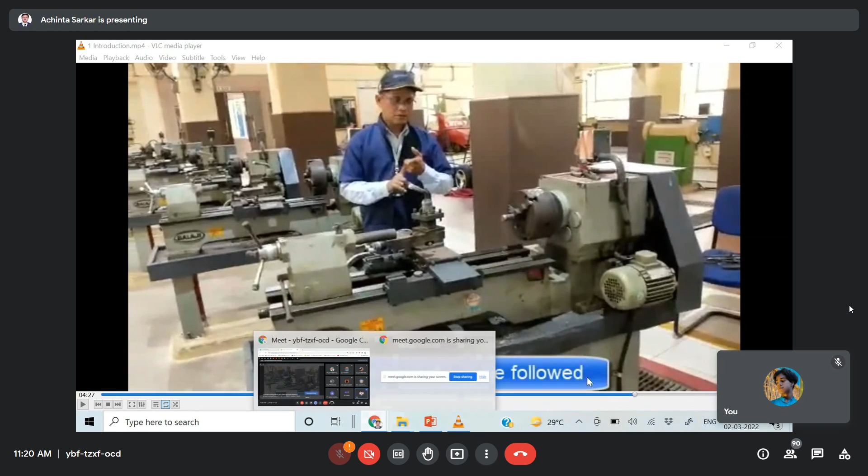So our aim is, sorry, our aim is to make the finished cylindrical surface. Okay, so now please mute yourself.

Hello. Mute yourself Pritish, your mic is on.

So this one is called the chuck. Okay, and this one is called the three-jaw chuck. Three-jaw chuck means, so here there is a hole on this outer surface. So if you tighten or loosen it, there will be the simultaneous movement of these three jaws, radially, inward or outward. If you tighten it, then these three jaws move in the inward direction, right? So now, in order to fix this job, you have to insert it into this hole of this three jaw chuck, and if you tighten it, then it will be fixed rigidly.

Now we can see this one is the motor, right? So the motor, and here there is a gearbox inside this space, okay, of this metallic container. Now if you revolve it, so here belt and pulley is there, right? Okay, so if you run the motor, then this chuck will revolve, right?

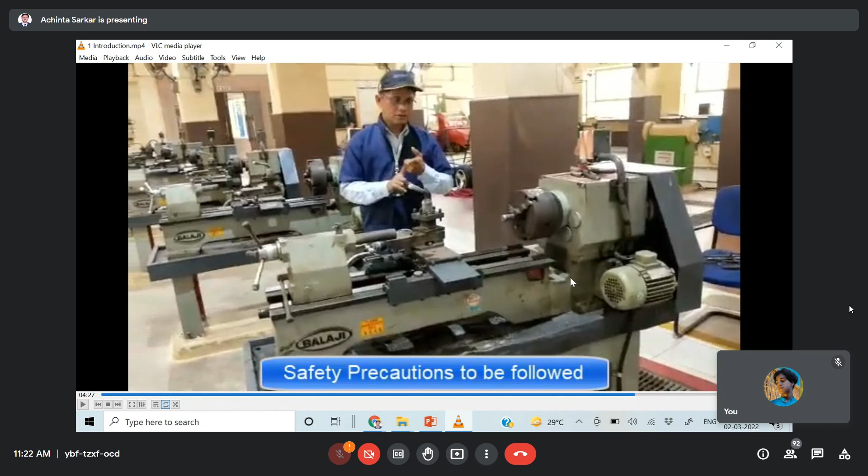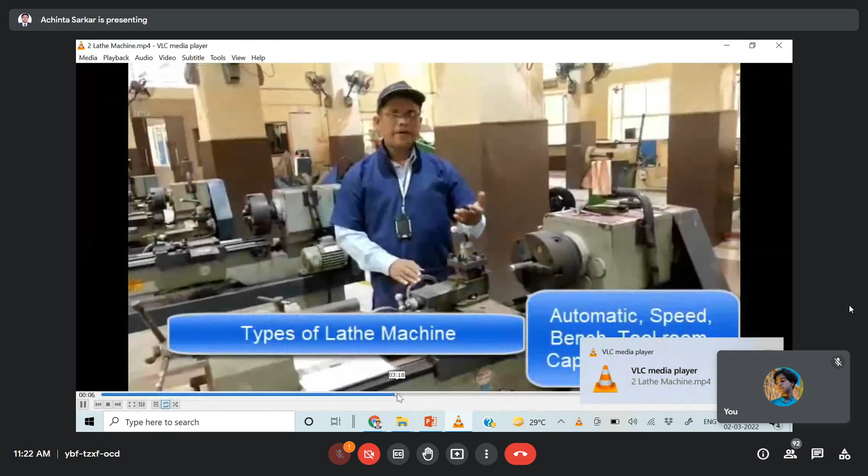Now if you move it to this job, right? So let me draw. Let me show you another one. Here this one is the tool post.

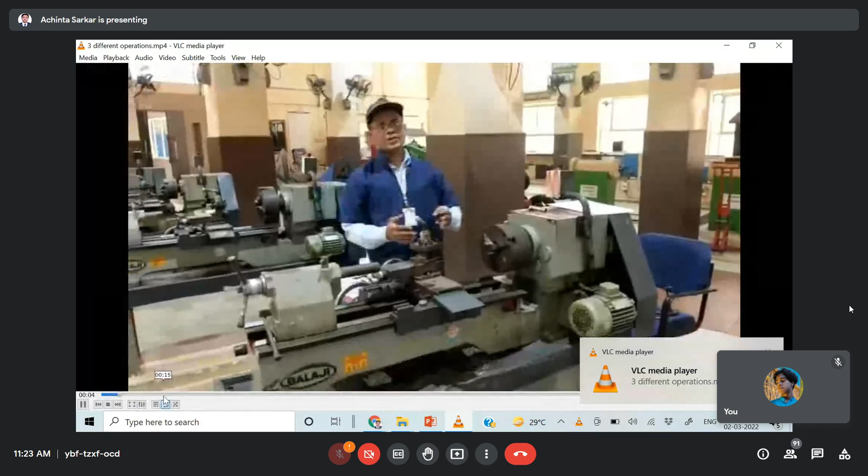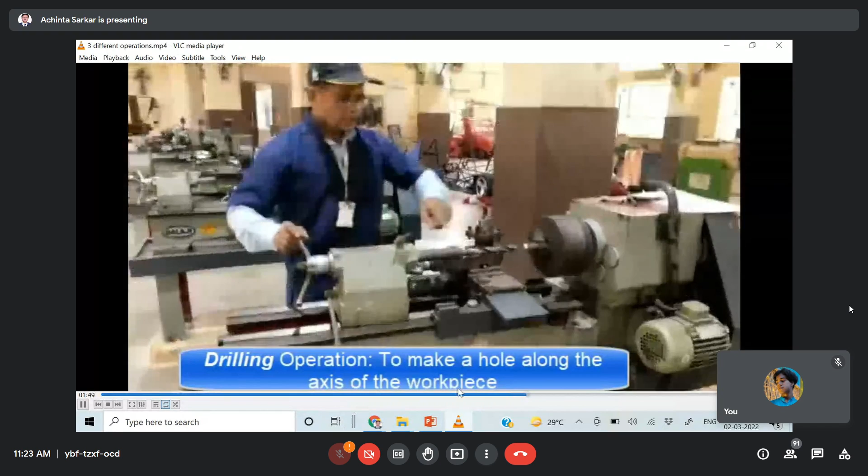You can see here, is it visible? Yes sir, yes sir, yeah, it is visible sir. Okay, so here you can see there is a revolvement of this chuck. Okay.

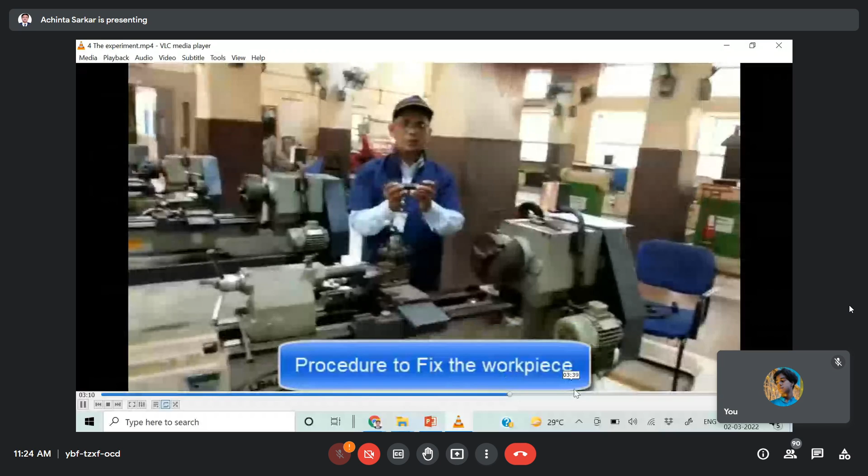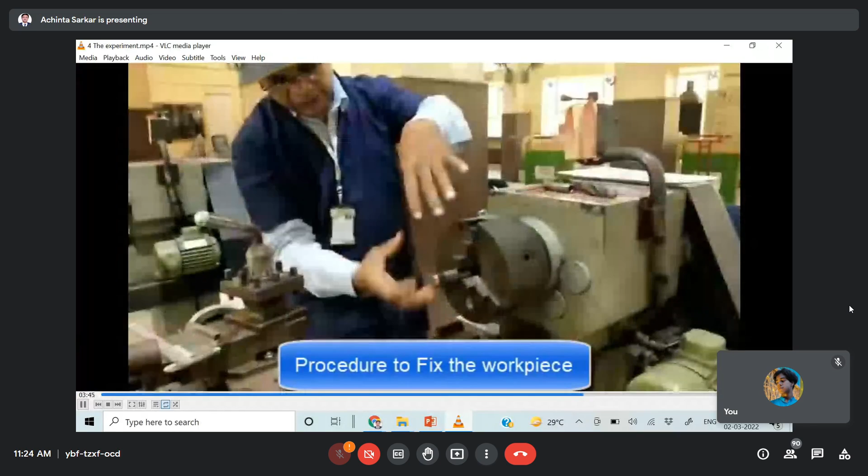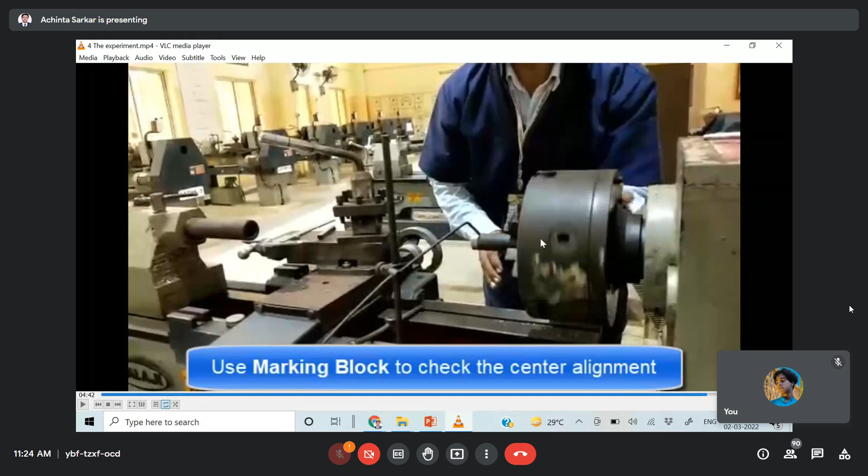I just want to show you how. You have to fit the cutting tool. This one is the cutting tool. For the cutting tool, you have to create a cutting edge. Where is the cutting edge? This is the cutting point. Okay, this is the cutting edge.

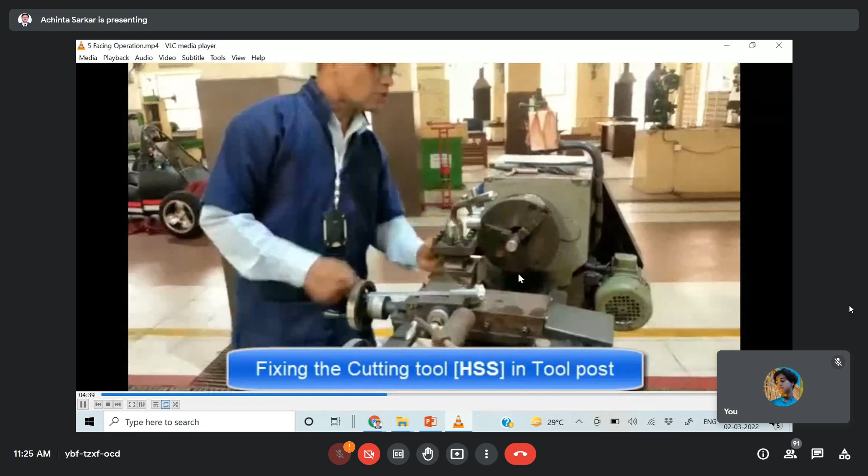Here, the angle of the cutting tool, you have to maintain. Why do you have to apply this angle to the cutting tool? That means the cutting point should be made such that there is no material remaining in the center of the workpiece. So the cutting point should exactly match the center of the workpiece. That's why now study how.

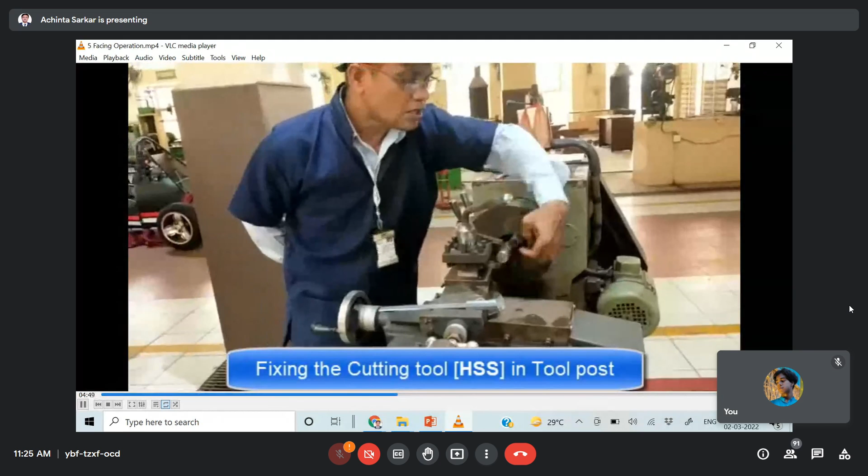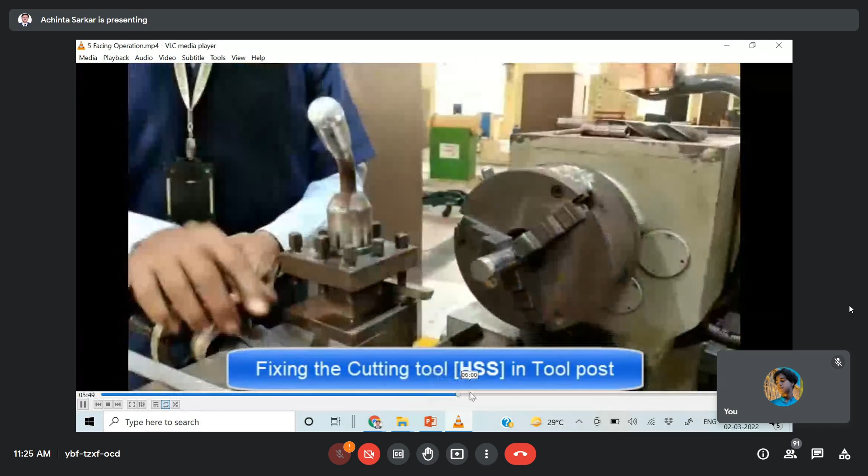From the rigidly formed cutting tool to the tool post, so that it can cut. Okay, that's why the tool is set from the outer workpiece. That's why it is made like this. You can see this one is a cutting tool.

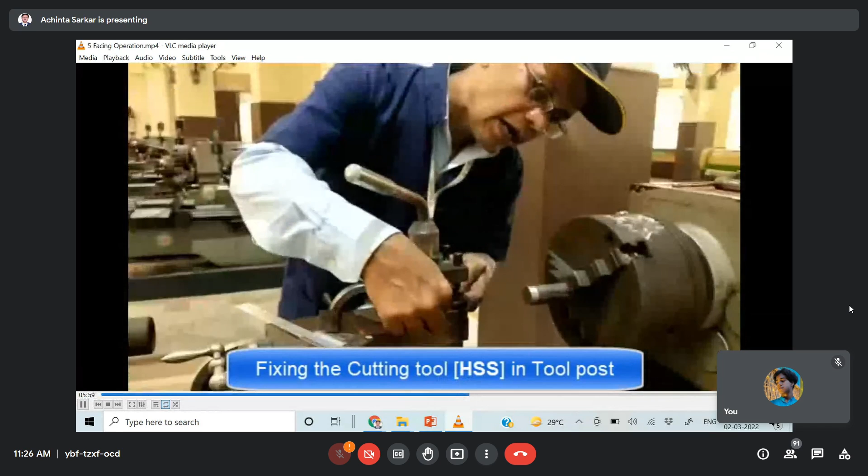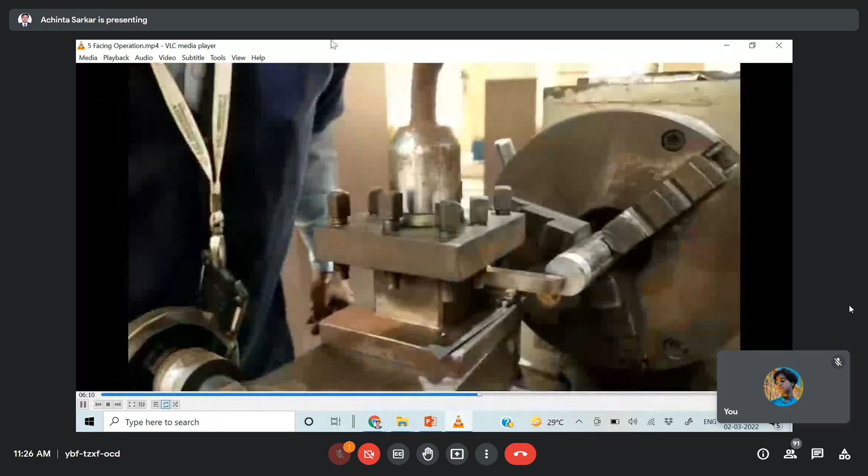It has to go through this center. That's why now you have to type. For tightening tool post, first you have to log the center.

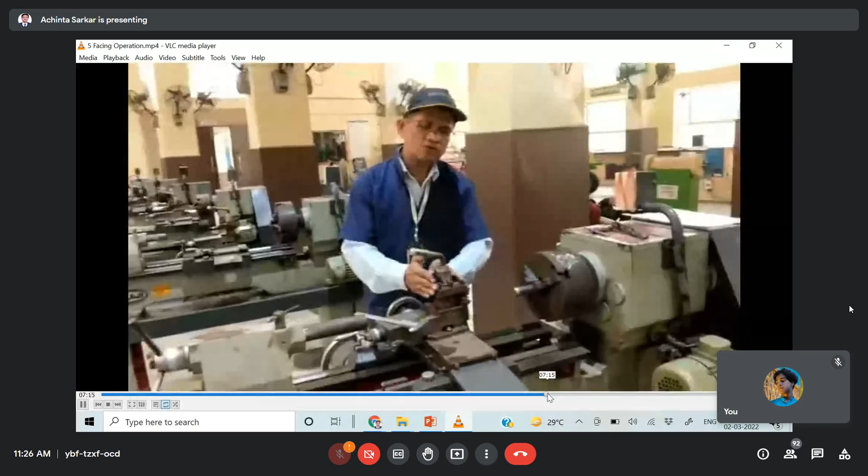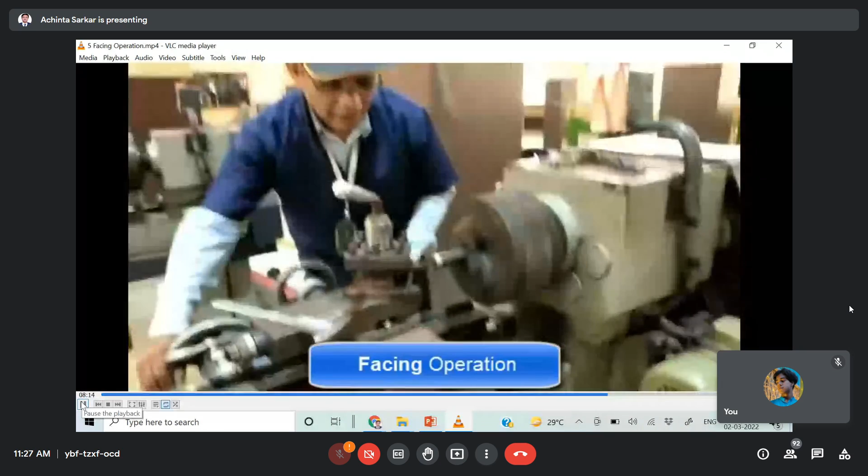If you slide this tool, this is the sliding mechanism. If you slide it in the longitudinal direction, then it will cut this outer surface, and if you move or slide along the cross section, or it is called cross-wise direction, then it will cut the material from the face. It is called the facing operation.

So there are two kinds of feeding. One is called the longitudinal feed, and another one is called the cross feed. Longitudinal feed is the feed along the axis of the job to cut the extra material from the outer surface of the job, and when it is perpendicular to the axis of the job, then it is called the cross feed. It is to cut the extra material from the face, in order to make the face a flat surface. Understood? So these are the idea.

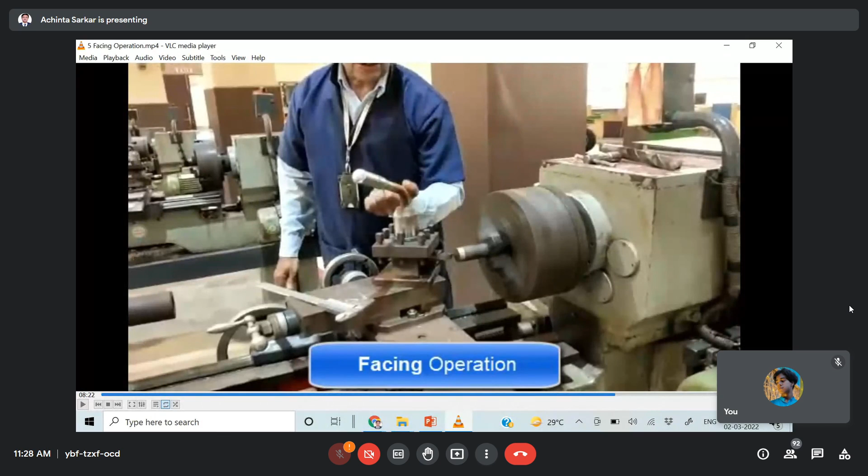This one is the idea about the turning. Okay, so now let me draw the figure.

Screen is visible, right? Yes, sir. Yes, sir. Yes, sir. Okay. Yes, sir.

So this one is the axis of the job. Spindle is there. This one is the big spindle. This one is the cutting tool. Oh, sorry.

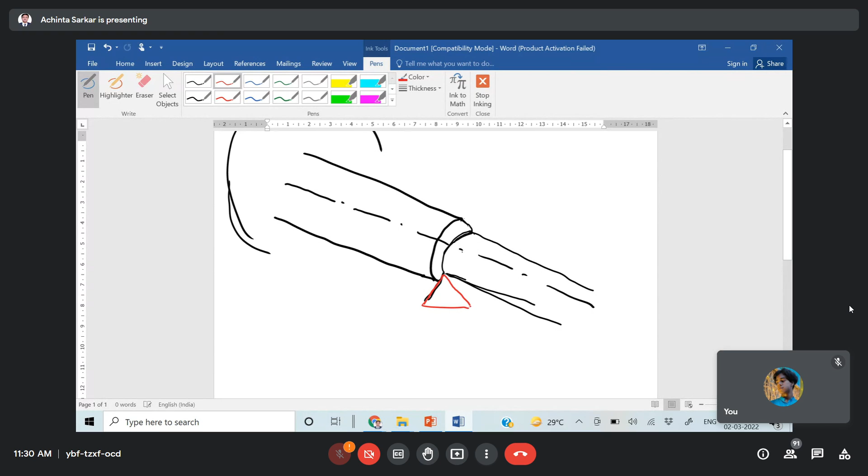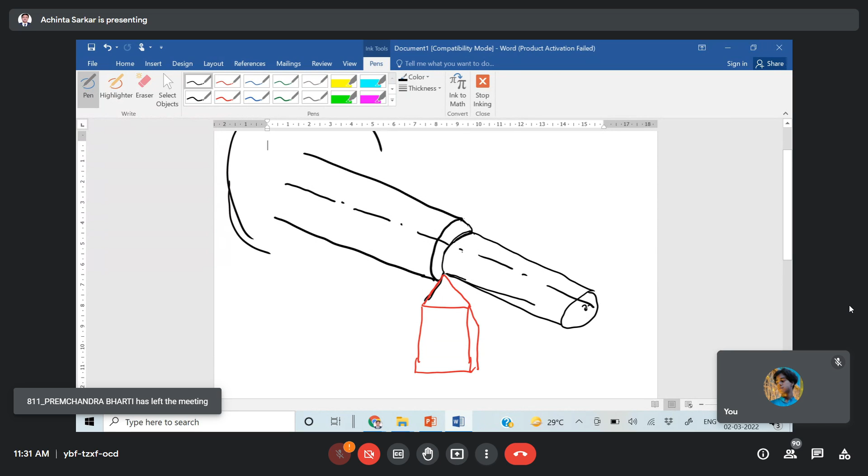Whatever you have seen in the video, so this one is the cutting tool, here it is in the 3-jaw chuck. Now you can see actually these two will be perpendicular to each other, so the angle is 90 degrees. So you have to imagine.

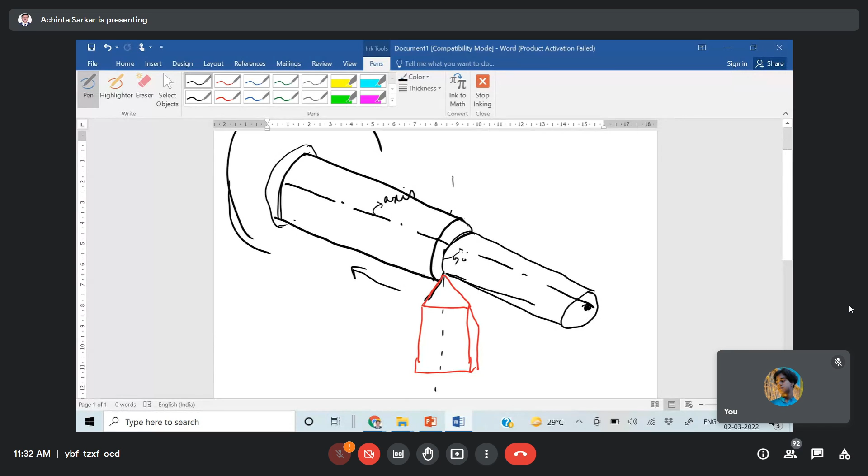So now you can see, student, there are two kinds of feed. One is along the axis, so this one is the axis, and another one is along the cross-wise direction of the axis, so that one is this one.

So when this tool is on the tool post, when this tool moves along the longitudinal direction or parallel to the axis, then it will remove the extra material from the outer surface of the job in order to make the desired cylindrical shape.

Understood? And if it is moved along the cross-wise direction, so this one is nothing but this one, then it will cut, it will make a groove, or you can say you can do a facing operation.

Understood? So if it only goes towards one direction, then what will happen? It will cut only at a single point, so it could be either here or here at any point. So it will make a groove if there is no movement and it only moves in this direction.

But when the tool moves from here in this direction, then it will cut the extra material from the outer surface and it will make the finished cylindrical surface. Now say here this one is the face.

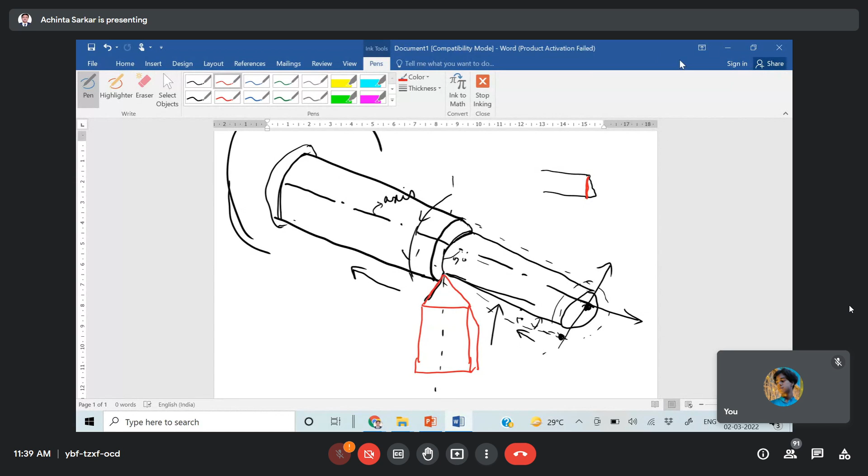Student: Yes, sir. Okay. So now we will discuss the various parts of the lathe machine.

So we'll draw it right now after the turning part? Yes, yes, yes, okay.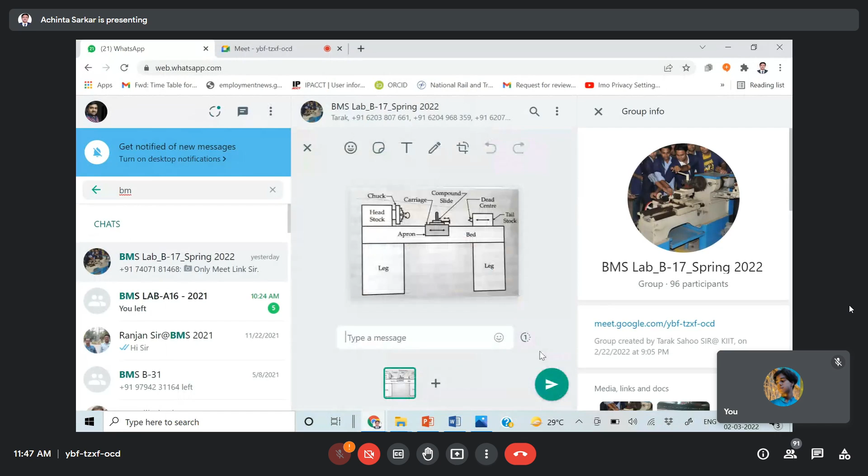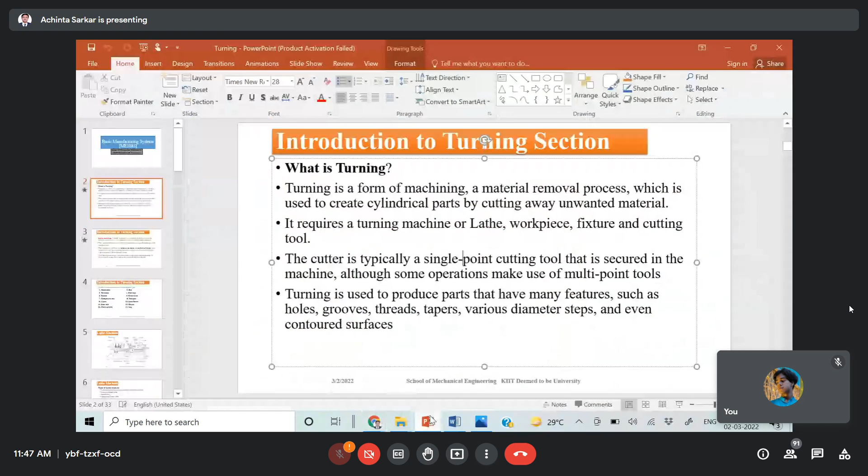First you write the parts of the lathe machine. Sir, after what is turning, we have to write the parts? Yes, parts. Okay sir.

So we have to continue like after turning? Yes, yes, yes, yes, after turning.

After this, draw the figure whatever I have shared in the WhatsApp group. Do not use any scale or anything else. So it should be freehand. Yes, it should be a freehand sketching.

Okay sir. It can be drawn with both pen and pencil, or no? Yes, yes, yes, both pen and pencil, no issue.

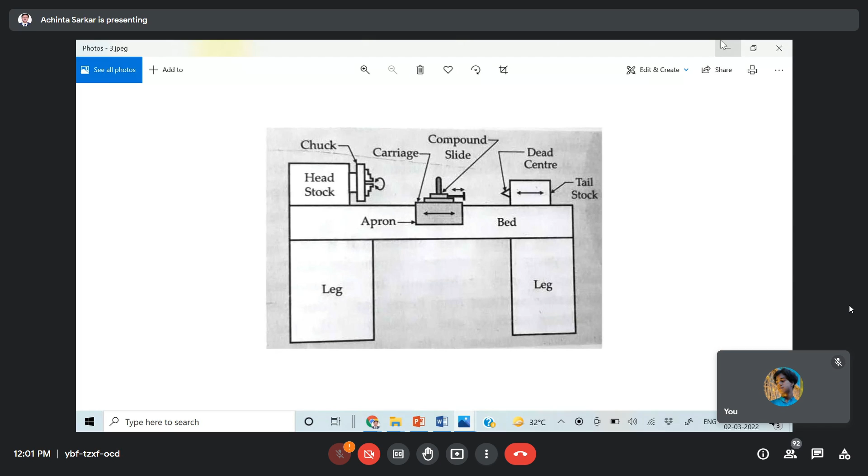So now the carriage is this one. Here it is called the carriage. The lathe carriage serves the purpose of supporting, guiding, and feeding the tool against the job during the operation of the lathe. This one is the tool post, and this one is the bed, and on the tool post, so this total system is called the carriage.

So now you can see here, this one is called the compound rest. By the use of this compound rest, you can rotate this tool post by 360, and this one is the cross slide, cross feed. You can give cross feed as well as the longitudinal feed. So it can move to and fro as well as in the crosswise direction.

So I have drawn a figure here. This one should be like this. So now, students, we are traveling this tool parallel to the axis. Now if you make some angle with this axis, then what will happen? It will be like this. Say your tool is there. If you move this tool from here in this direction, then what will happen? Say it is here.

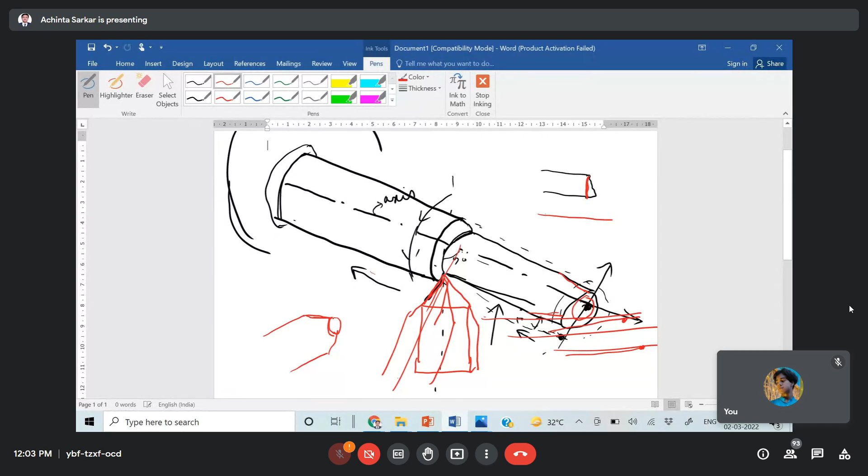Okay. So it will make like this shape. Or if you draw the 2D diagram, then it will be like this. Understood? This is the taper section. Yes, sir. So if you make some angle by rotating this compound rest.

So these are all formed on the carriage. Now the carriage consists of the saddle. You can see this one is the saddle. The saddle can move in the to and fro direction. It is the part of the carriage which slides along the guideways and supports the cross slide. This one is the cross slide, and the compound rest. This one is the compound rest, and at last this one is the tool post. So the saddle supports the cross slide, then compound rest, then tool post.

Now the cross slide is mounted on the top of the saddle and always moves in a direction normal to the axis of the main spindle. So it always moves in this direction. Sorry, not rotation; it moves in the crosswise direction. So it is basically used to give the cross feed.

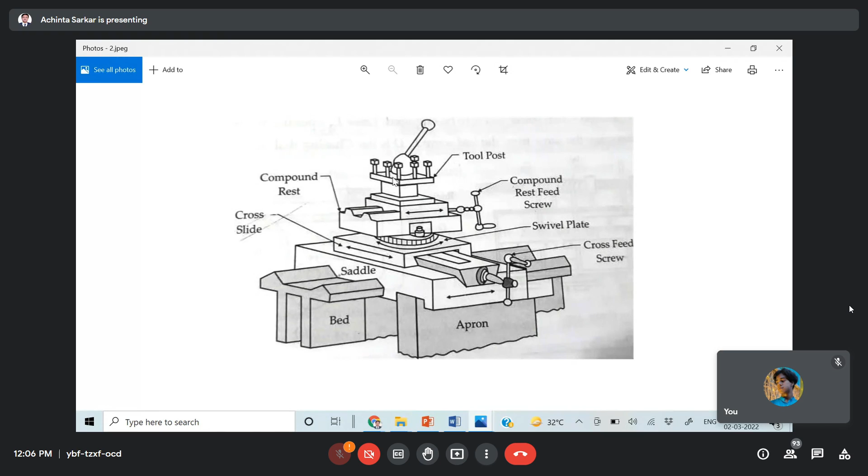Understood? Now the compound rest. This one is the compound rest. It is also known as the compound slide. It is mounted above the cross slide. And the tool post is the topmost part of the carriage and is used for holding the tool or tool holder in position. So after holding this tool, with the help of this compound rest, you can make any angle, any operation you can do.

Now this one is the three-jaw chuck. These chucks provide a very efficient and true device of holding the work on the lathe during the operation. So this one is the nut. If you tighten it or loosen it, then this jaw will move either in the inward or outward direction.

So this one is called the self-centering. You do not need to do anything. Once you insert and tighten it, it will perfectly stay on the center of this hole. Okay, right.

Three-jaw universal chuck. It is also known as scroll chuck or self-centering chuck. It consists of a cylindrical body having three jaws. You can see here, three jaws fixed radially at its front. Further, it carries a through hole at its center to enable the long job to project backwards in the spindle. So the spindle is there inside this chuck, right?

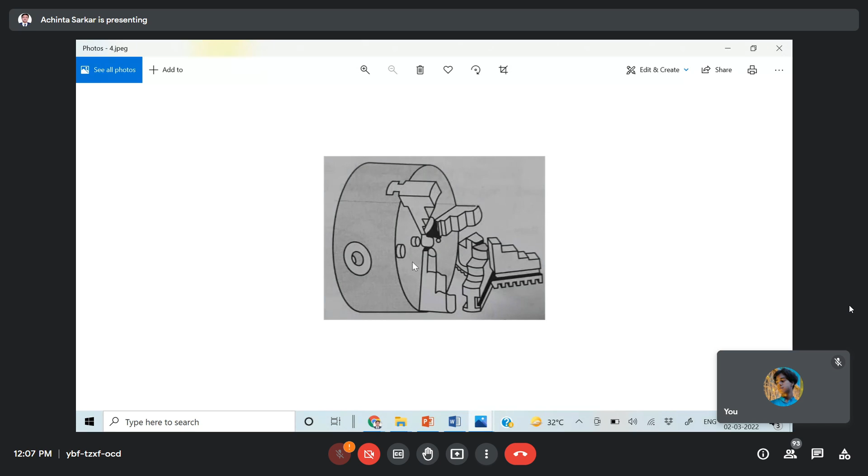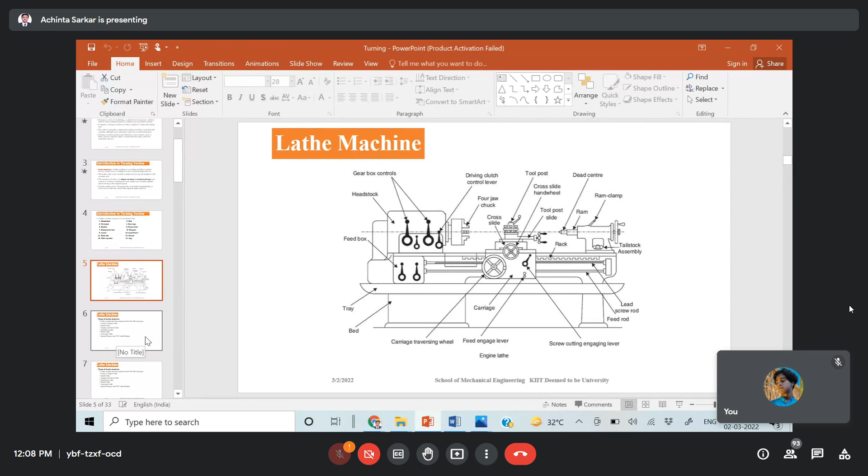So any question about these things? So should we have to draw this on our copy? Which one? Sir, the last three you showed us. Yeah. I'm not getting you. Tell me.

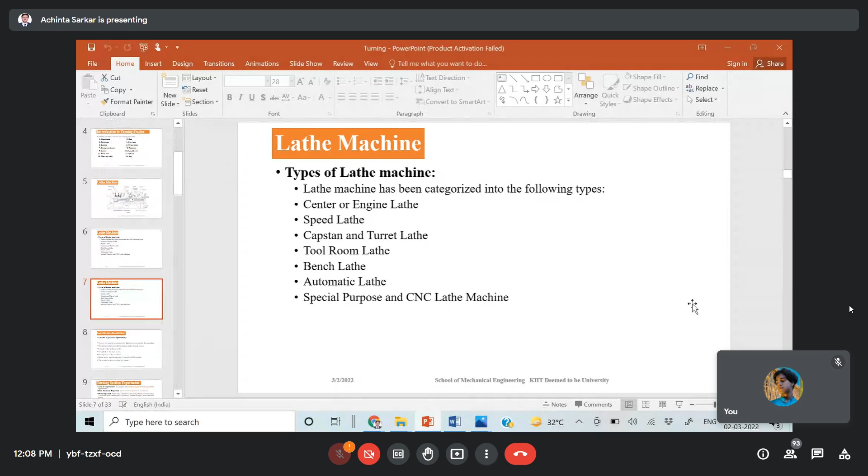Okay, now types of lathe machine. There are many kinds of lathe machine. Lathe machines have been categorized as center or engine lathe, speed lathe, capstan and turret lathe, tool room lathe, bench lathe, automatic lathe, and special purpose and CNC lathe machine. Okay. Sir, we'll write this? No. I'll tell you.

So a lathe is generally specified by the swing, the largest work diameter that can be swung over the lathe bed, and the distance between the headstock and tailstock centers. So there are two stocks, one is the headstock and the tailstock, right? So by this distance you can specify the lathe machine. Length of the bed in meters, the pitch of the lead screw.

So pitch, that is the distance from one point to the next. Suppose there is a thread on this rod, and the thread is like this. Suppose this one is the point, consider it point A. Now, after one revolution, you can see the same point will be this one, so let it be B. Then the distance AB is called the pitch of the lead screw.

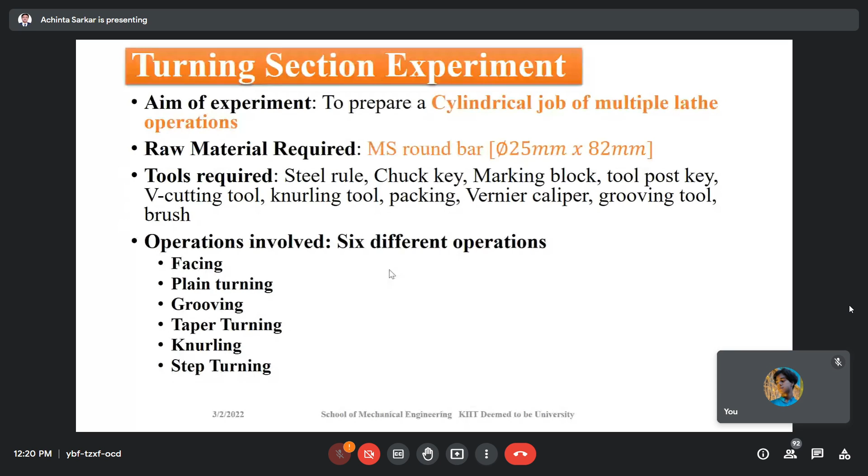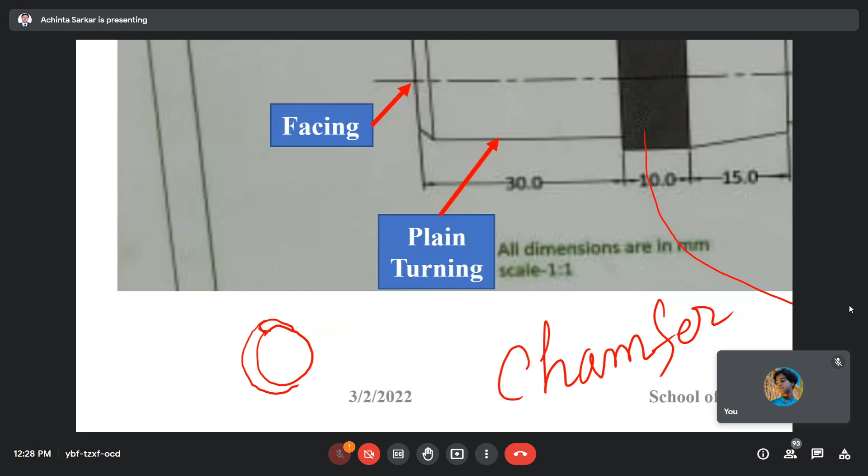Sir, what is meant by 2 into 45? Here, this length is 2 mm, and this angle is 45 degrees. Okay, sir.

Sir, what do you mean by chamfer? Chamfer, I told you, here you can see this one is the taper turning operation, right? This one is the bigger one. But sometimes stress concentration is there. You know stress is defined as sigma equals applied force upon cross-section area.

Yes, sir. Right. So say this one is a shaft. On this shaft, a very high amount of force can be applied. So from where can a crack be generated? This one is the corner, you can see. This one is the flat one, and this one is the cylindrical one. These two surfaces are perpendicular to each other and meet at this corner, right?

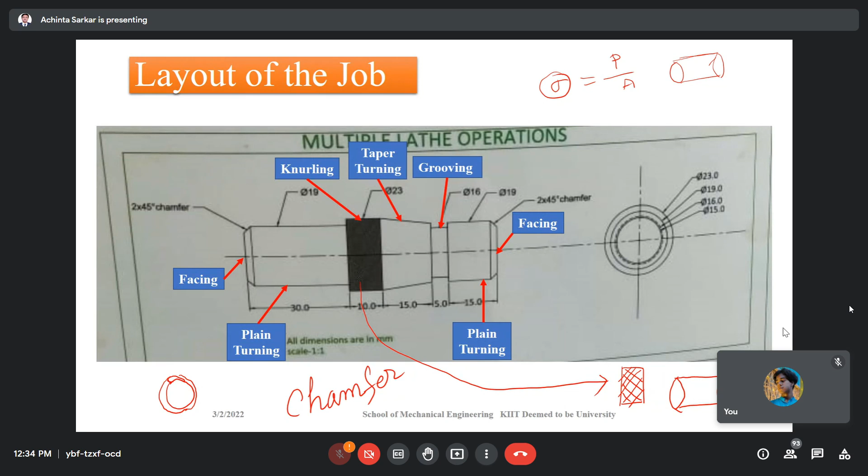Sir, we have done this drawing. Okay, so you all have done, right? Okay yes, then, step by step procedure.

First, you have to fix the cylindrical workpiece in the chuck using the chuck key and true it using a marking block. Fix the single point cutting tool in the tool post so that its cutting point coincides with the axis of the job. Then perform facing, plain turning, and chamfering operations as per requirement.

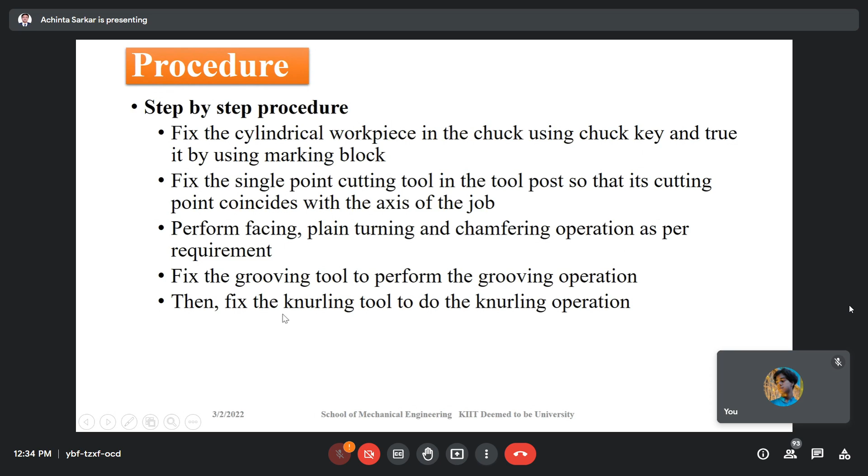Fix the grooving tool, which I will show you, to perform the grooving operation. Then fix the knurling tool to do the knurling operation.

Now safety precautions. In engineering, whatever assigned work you do, safety is the first thing, right? There is nothing more precious than life. So, safety precautions to be followed during turning operations.

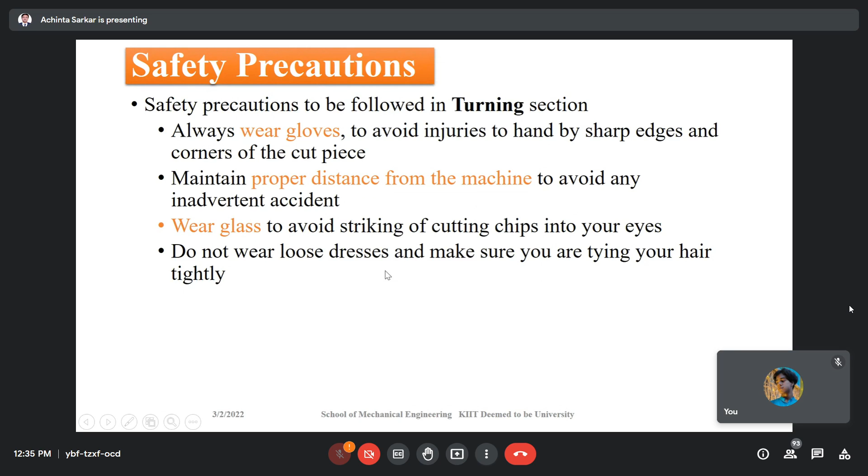Always wear gloves to avoid injuries to the hand from sharp edges and corners of the cut piece. Maintain proper distance from the machine to avoid any inadvertent accident. Wear glasses to avoid cutting chips striking your eyes. Do not wear loose dress, and make sure you tie your hair tightly.

This is the facing operation. If you feed the tool in the cross direction, it is called facing. A single point tool moves radially along the end of the workpiece, removing a thin layer of material to provide a smooth flat surface. The depth of the face cut is typically very small, meaning depth in this direction. It has to be small, otherwise there can be failure of the cutting tool.

So a very small amount may be machined in a single pass, or it may be reached by machining at a smaller axial depth of cut with multiple passes. Multiple passes means, for example, if you have to remove a very large amount of material, you can't do it at a single time, so you do it step by step—that is called multipass. The tool used is a single point cutting tool.

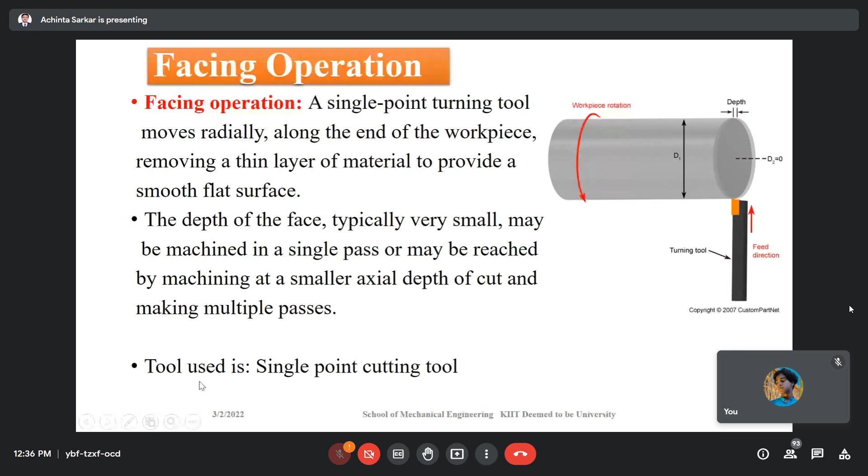Now the plain turning operation, which I already told you about. In plain turning, a single point turning tool moves axially, parallel to the axis or longitudinally, along the side of the workpiece, removing material to form different features including steps, tapers, chamfers, and contours. These features are typically machined at a small radial depth of cut, and multiple passes are made until the end diameter, meaning the final dimension, is reached.

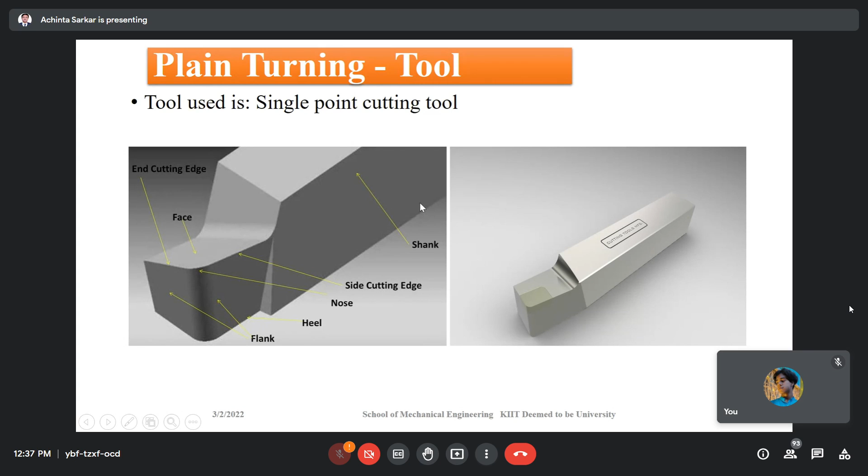So this one is a tool. This one is called the nose, and this is the cutting point, right? This is called the end cutting edge, and this is the side cutting edge. This cutting tool is called the single point cutting tool because it has only one nose.

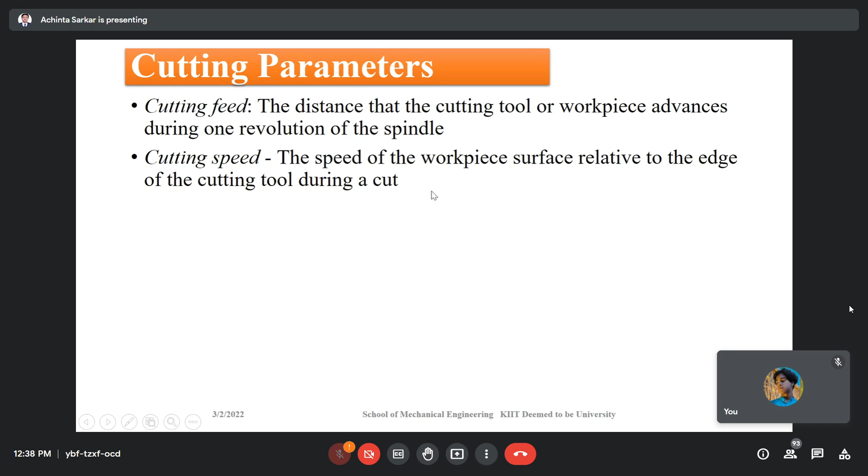Cutting feed is the distance the cutting tool or workpiece advances during a revolution of the spindle. Cutting speed is the speed of the workpiece surface relative to the edge of the cutting tool during a cut. Feed rate is the speed of the cutting tool's movement relative to the workpiece as the tool makes a cut.

Axial depth of cut is the depth of the tool along the axis of the workpiece as it makes a cut, as in a facing operation. Radial depth of cut is the depth of the tool along the radius of the workpiece as it makes a cut, as in a turning or boring operation.

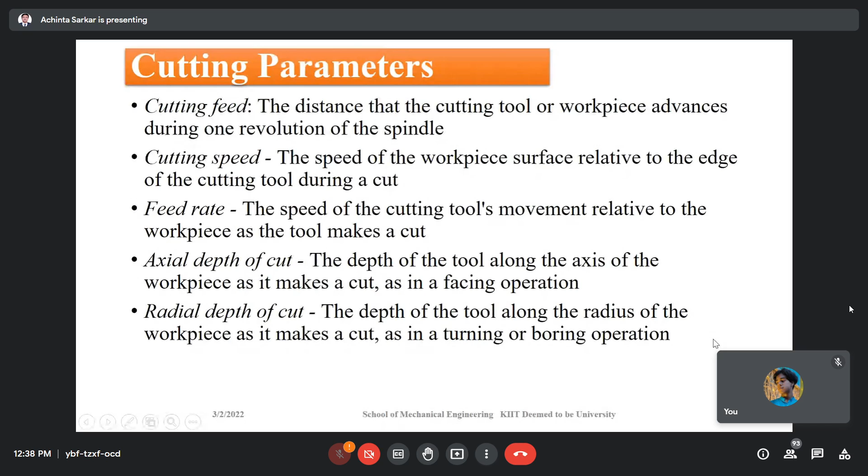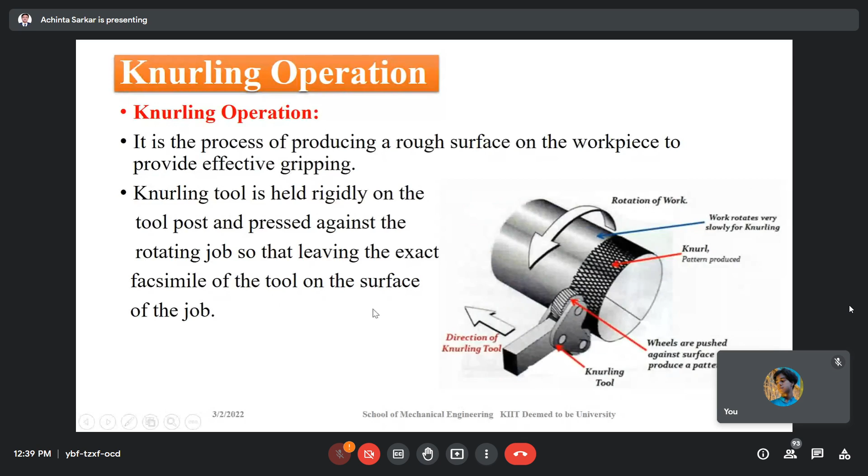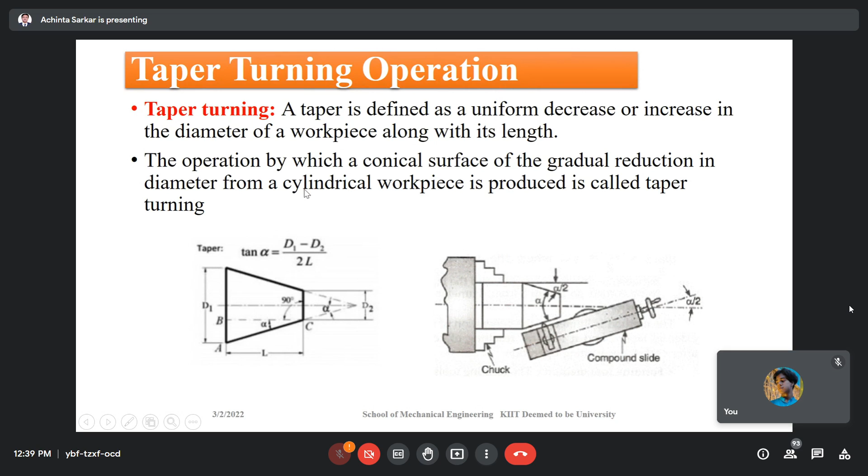Taper turning, I already told you. In order to perform the taper operation, you have to rotate the compound slide. A taper is defined as a uniform decrease or increase in the diameter of a workpiece along its length. The operation by which a conical surface, with gradual reduction in diameter from a cylindrical workpiece, is produced is called taper turning.

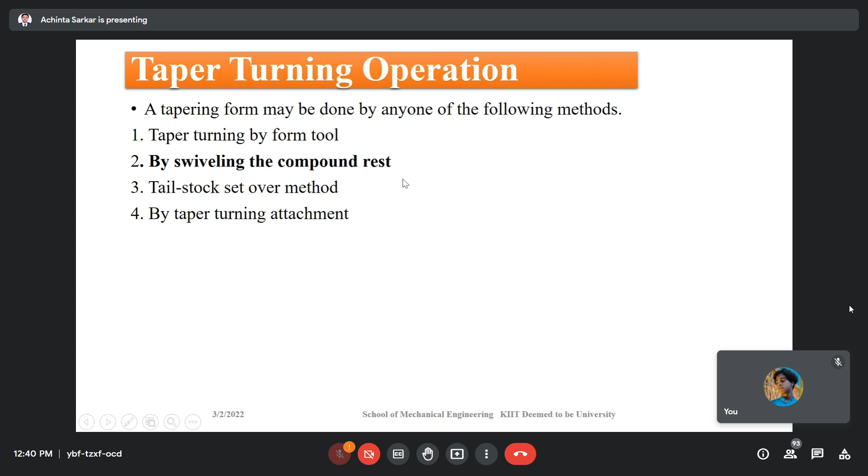Taper turning operations involve taper turning by a form tool, by swiveling the compound rest, by the tailstock set-over method, and by a taper turning attachment. By swiveling the compound rest, you set the compound rest. These are all the things that will be discussed during the presentation of the videos. How to do this taper operation will be more visible in the video.

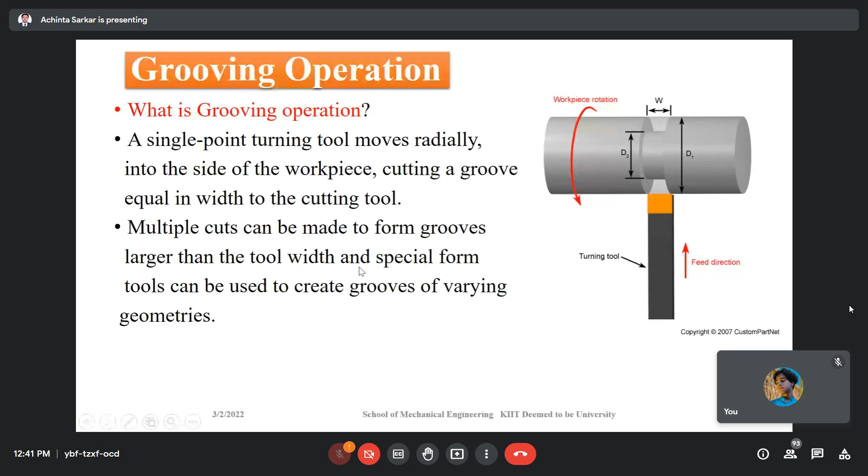So what is the grooving operation? You can see this one is the cutting tool used to make a groove. If you give the cross feed with the help of this tool, you can easily make the groove. A single point turning tool moves radially into the side of the workpiece, cutting a groove equal in width to the cutting tool. Multiple cuts can be made to form grooves larger than the tool's width, and a special form of tool can be used to create grooves of varying geometries.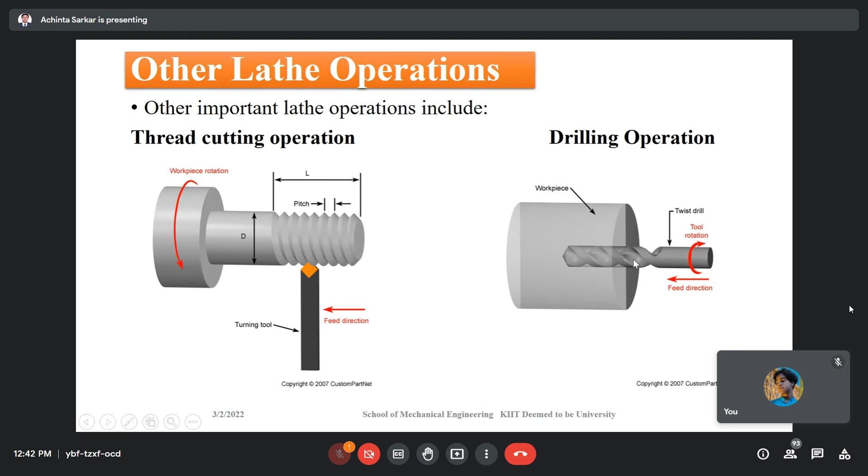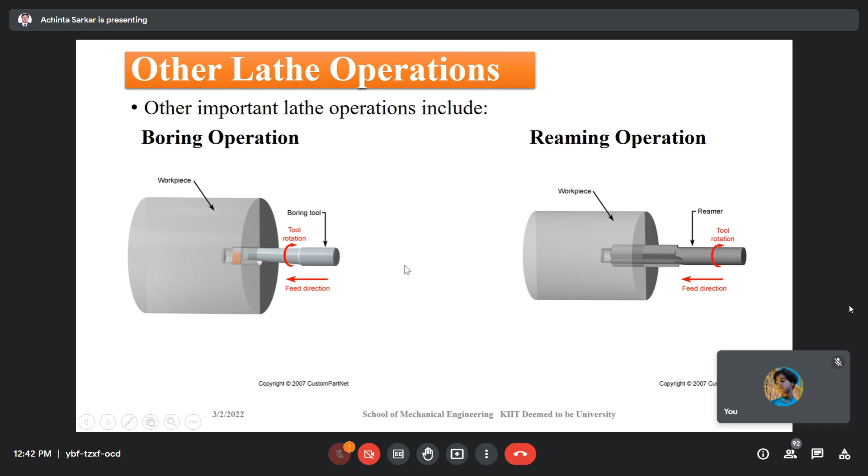Now the boring operation. Boring is also a kind of making a hole. Reaming operation is also a kind of making a hole, but the shapes are different. Tapping operation and all these things will be discussed during the presentation of this video.

So now, what is a CNC lathe machine? CNC stands for Computerized Numerically Controlled. You are the expert who generates the code, the code to execute something. It would be to control the performance of a factory, or it could be to control some instrument. If you generate the code, then you can convert this base lathe machine into a CNC lathe machine, a computer-controlled lathe machine.

So everything can be done numerically, or automatically, and you can get more precision in dimension. At last you have to achieve the final dimension, that is your aim. If you do these things manually, then there can be many errors, because of human error, measurement error, hearing, and many other factors involved in manual operation. But if you do it in an automatic system, then you can reduce the error.

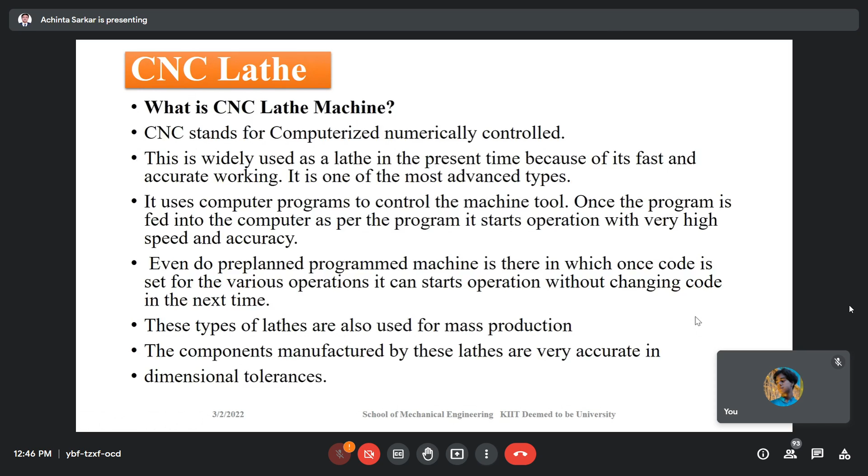So here, this one is the CNC machine. Inside this casing, you can see there is a lathe machine. If you form it on this spindle, then here this one is the control panel. So if you program it, then you can get the desired shape and size.

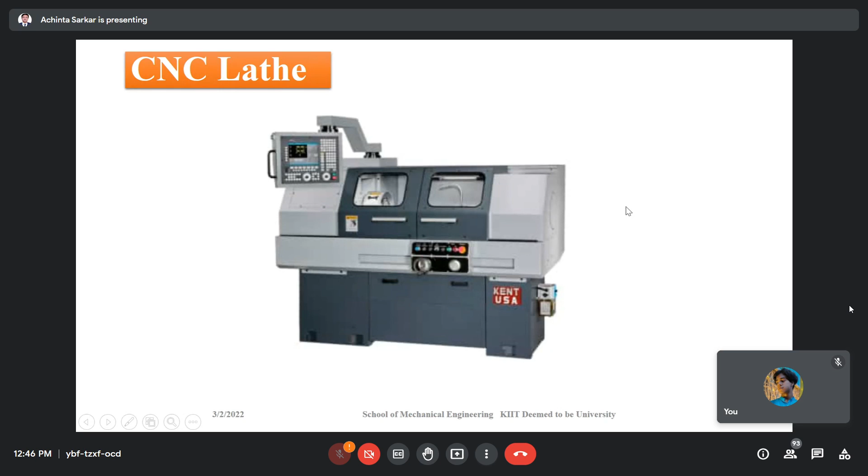So this we will do in the third class. If you have any question, then please tell me.

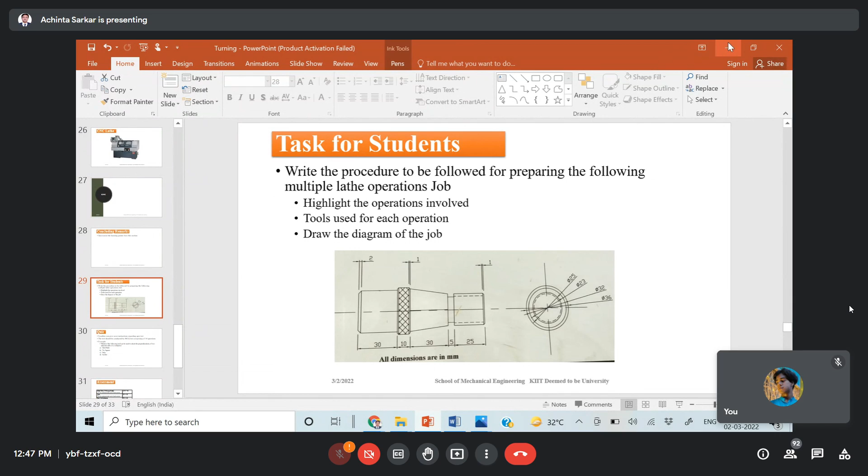Sir, assignment 1 is over. Yes, assignment 1 is over. Sir, that much you have written, we have to just scan it and send it to the classroom. Sir, it's just the turning parts diagrams and the turning section experiment aim, up to the diagram. We have done that. Yes, okay sir.

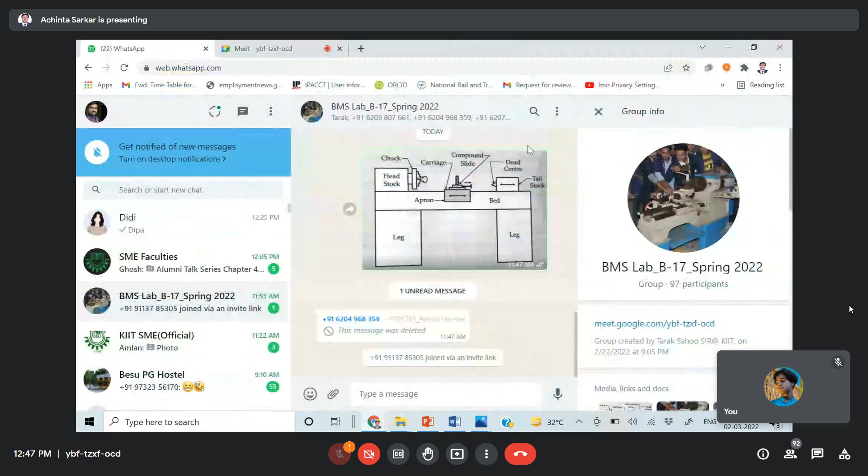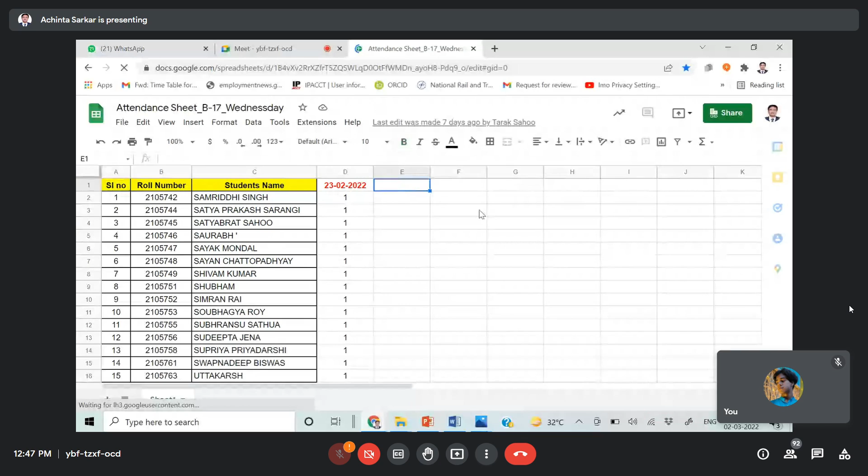Sir, I and some students have converted from offline to online, so we don't have the classes and Google Classroom link. We do not have the Google Classroom link, so will you share it for this class? Sir, I and some students converted from offline to online, so we do not have the links. The link is in the WhatsApp group. So we are not in the group. You just join. Okay yes sir, just joined. Okay, then you will get it. Okay, I will paste this link.

So the deadline to submit this assignment is Saturday. No matter if you... that's okay, so whatever I did, that is for you only. Sir, but if we have written any issue today in the class, can we submit it now? Yes, now that will be good. Okay sir, yeah sir.